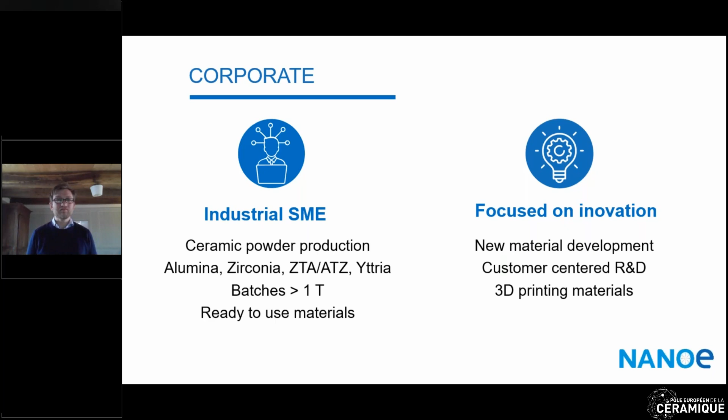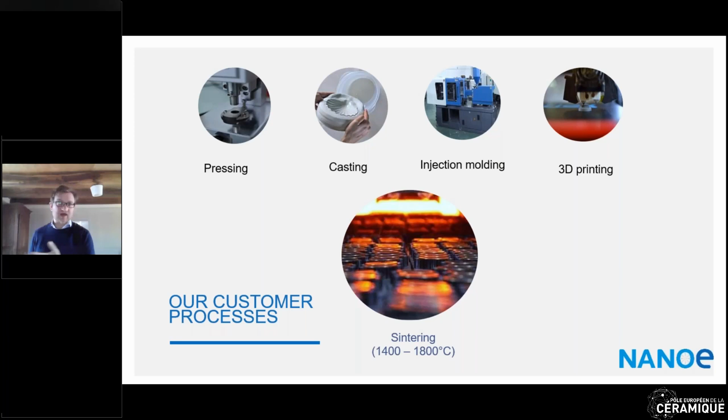So how do you make a ceramic in general? What do our customers do with our raw materials? Well, there are quite a few different processes for shaping ceramics, but it's always the same thing: you have a shaping process and then a sintering process. Shaping can be done usually by pressing, casting, injection molding, or by 3D printing, and we do provide raw materials for all of these processes.

So powders for pressing, slurries for casting, feedstocks for injection molding, and raw materials that can be used directly in 3D printers. The main applications then are semiconductor, biomedical, and wear parts and toolings. In these fields, what we do are usually high-tech, high-end raw materials, most of the case for traditional shaping process, in order to increase the wear resistance and the life cycle of our customers' products.

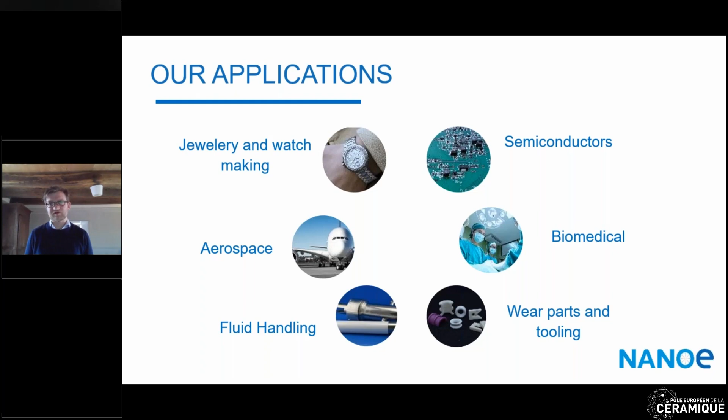So now let's talk a bit about Zetamix 3D printing. Zetamix is a brand we launched a bit more than 2 years ago. We started working on materials for 3D printing, and we decided to launch a line of materials for FDM printing.

So what do we do exactly in this case? Again, we're a raw material supplier. What we do is prepare raw materials that are compatible with existing machines on the market, here FFF machines, which are usually used for thermoplastics.

So how do we do that? We just make two steps of preparation. We do some compounding, which is a mixture of powder and thermoplastic binders, and then we extrude it to make a filament.

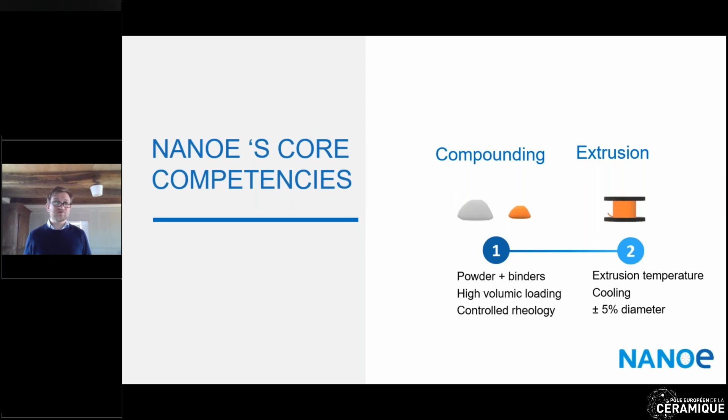So yes, our core competences are really in the compounding part, so a mix of several binders with a ceramic or a metal powder, and then the extrusion of these very highly loaded filaments. We usually have more than 50 volume% of powder in the mix, which means something like 80 to 90% in mass, and that makes it quite difficult to mix and to extrude.

Regarding the materials available, we started with ceramic, as this is really our core business - alumina, zirconia, black zirconia - and we recently launched also a stainless steel filament for applications mainly in tooling, but I'll go back to that later on.

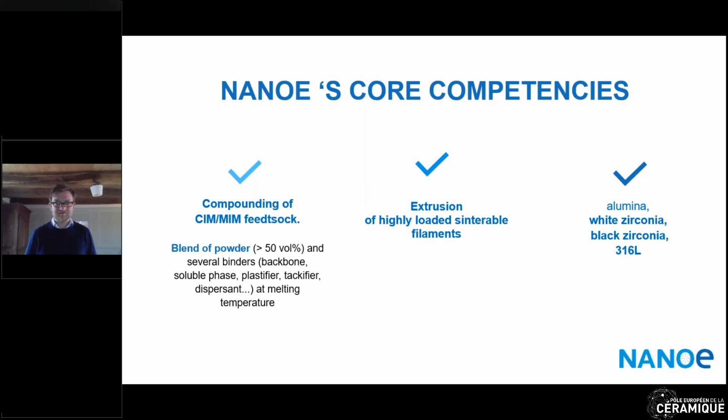So once you have that filament, how do you get to a dense part, to a final part? Again, it's a several-step process. As with any process to make ceramics, you usually have a shaping process, which will here be replaced by printing, and a sintering process.

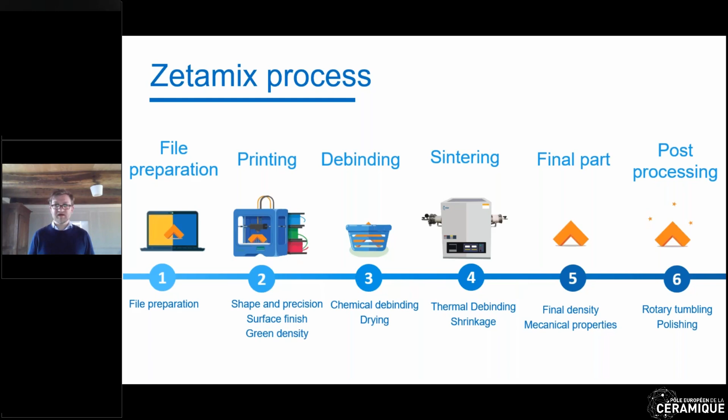If you go to the beginning, you actually start with the file preparation, so that's quite straightforward. Printing, debinding, sintering, and then you get the final part that you may want to post-process. I'll go in details about these different steps.

The first step is file preparation. As we are using open systems, one of the good things is we don't have a specific software. We use software which are already on the market, and most of them are open source. That means we just have to download it and we can use them to prepare our files.

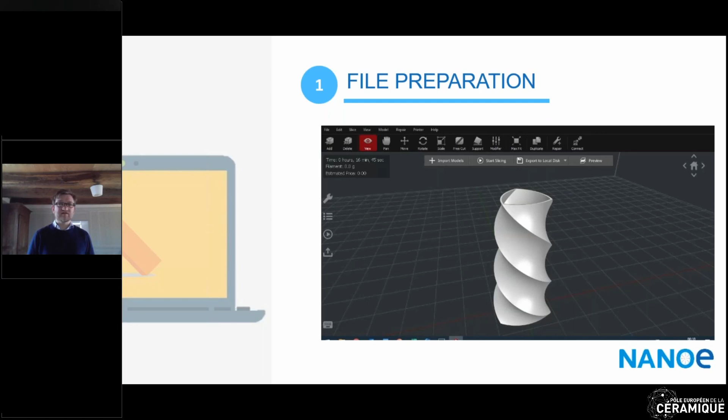This is a slicer called IdeaMaker, but you could use Cura or any other slicer on the market. With this slicer, we can see the virtual plate, the build plate of the printer, and we are going to load the part, the STL 3D file we want to print, and the slicer is going to translate it into a set of instructions for the machine. So this is what we see here.

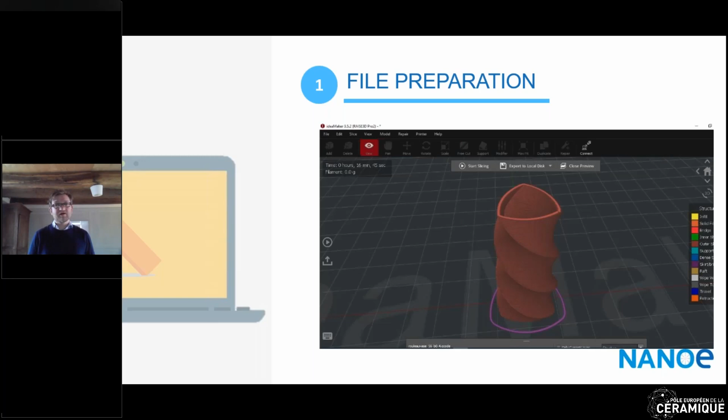We can see the layers, and that's really exactly the tool path that the machine will follow during printing. Once we have this file, we can upload it to the machine directly or through a USB stick or whatever, and then we go to printing.

Printing is really exactly the same thing as FDM and FFF printing. For those who are not familiar, FDM printing is made with a thermoplastic material. In our case, it's a mix of thermoplastic and powder in the form of filament, and this filament is pushed through a heated nozzle and melted. And we deposit the material in the melted phase, and it will cool down.

And make a solid part afterwards. We can also use a second nozzle to print with some support materials if we have some geometries which are not possible to print with just one material.

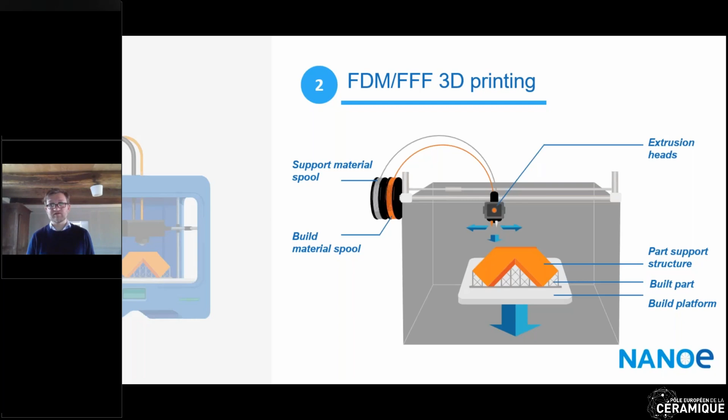Once we have printed, we get to the, I'd say, most complicated phase, which is debinding and sintering. Debinding, the objective is to remove all the plastic binders without damaging the part, and that's really critical - managing to remove all of the binder without having any cracks, any damage, any deformation in the part.

This is usually done by a two-step debinding process. The first step is solvent extraction - we will dip the part in the solvent, in our case it's acetone - and then the thermal debinding, where we put the part in the furnace, and in the furnace we will burn the rest of the binder.

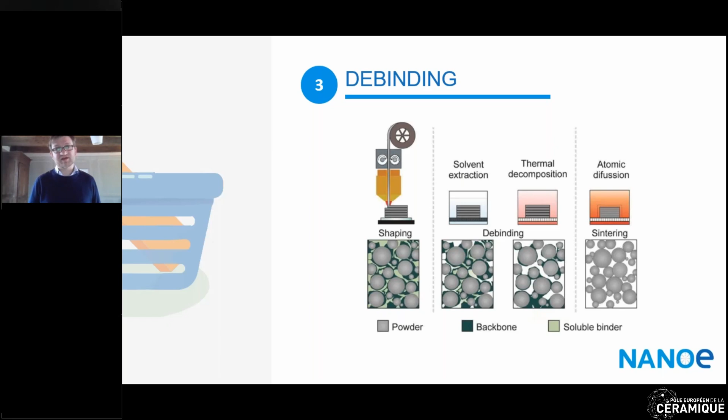And then once you have burned this binder, you will have what we call a brown part, or a debinded part, which is extremely brittle and which must be sintered to get to the final mechanical properties. What happens during sintering? Sintering means going to high temperature, a bit lower than the melting temperature, but still relatively high, to get to a dense ceramic or metal.

What happens during sintering is the porosity that you can see between the grains is going to be removed outside of the ceramic by solid diffusion phenomena, and the grains themselves will kind of melt together and grow to get to a dense microstructure. The typical densities we can reach with this process are up to 99% for ceramic. For metal, it's a bit lower, it's usually 90 to 95, but this is really quite good enough for most

applications. Obviously, going from a porous material to a dense material means there is some shrinkage. The porosity needs to go somewhere. And it goes outside of the part, and the part will densify and shrink. Linear shrinkage is usually between 15 and 20%, which is very significant and which is something that needs to be anticipated in the file preparation, and it will also have an impact on the precision and everything.

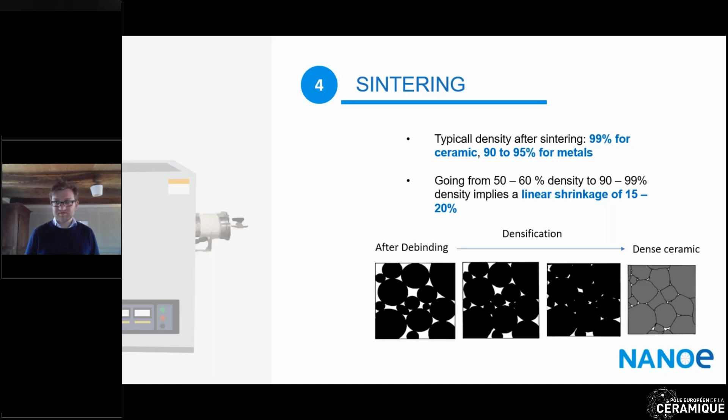What are the key benefits of this technology? The first thing is it's a very easy to use system. If you compare it with any technology for ceramic or metal 3D printing, I'm not saying it's completely obvious, but it's much easier to launch and to get started with 3D printing. Training time for this system is usually 1 day. When we sell some machines, we take 1 day for training, and customers are ready to print some parts.

It can be used by any trained technician. You don't need highly qualified people to use that. And there are very few security issues because we're not manipulating powder. We are manipulating filaments. That's really something which is quite beneficial. The investments are very low cost, and that's really one of the main things.

This comes from the fact that we are using an open system. That means you can use our filaments with any kind of printers. You don't have to buy the printer from us. We can sell some printers, but if we do that, we just buy them, adapt them a bit to the filament, and resell them. But we are not a machine manufacturer. We buy machines from the market, which allows us to have a starting offer with a printer, a debinding kit, and furnace, all of this for 10,000 euros.

And this is unheard of. You have no other technology that allows you to print metal and ceramic for that kind of investment cost. This is really unique. It's also a versatile technology. It is compatible with a wide range of materials.

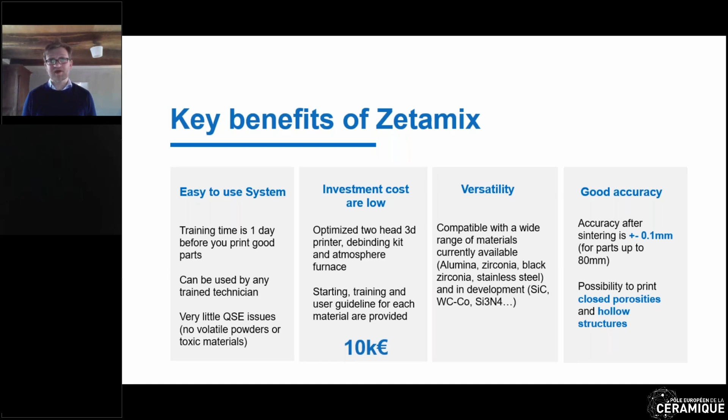Obviously, as any 3D printing technology, it's also interesting in terms of making complex parts, hollowed out structures, very low volume production, and so on. The key benefits I was stressing are mainly compared to other technologies. If we do want to compare with other technologies, here is a small benchmark of the mainstream technologies for printing of ceramics. I know that other technologies exist, but these are, I would say, the main ones: binder jetting, inkjet, SLA, and

FDM. Well, the first thing is obviously FDM will rank as the lowest cost in terms of price. This is the lowest investment cost you can find. In terms of accuracy, it's not the best, but it is relatively good. It allows you to get to dense parts, which is not the case of all these technologies, and the speed of printing is quite good. Again, everything is relative here. I'm not saying it's super fast compared to some other technologies for polymers, but for ceramic additive manufacturing, the speed

is relatively good. Apart from this technology, I would say that the most mature technology is probably SLA 3D printing, which is made with resins, and where you have a few players already making machines for this technology.

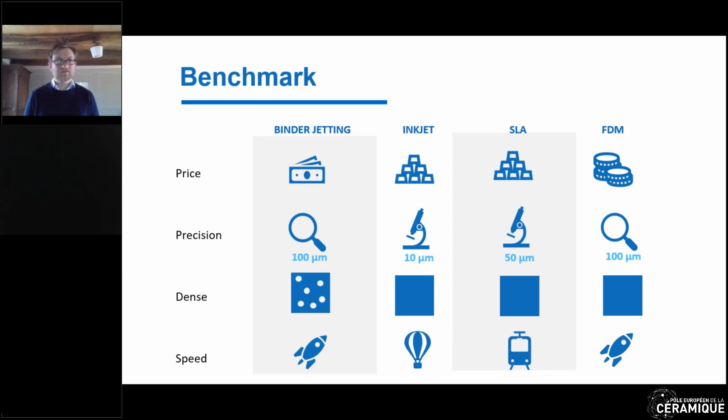What are the applications? Here I'm going to present only applications about ceramic afterwards, but I just wanted to mention metal also. The number one application we have for this technology is actually tooling. That means customers are using the system to print parts that are used internally. They're not selling printed parts. There are a few exceptions, but most of them are not selling printed parts. They are making tooling for internal use.

You do have a few industrials who are printing complex ceramic parts, usually for high temperature applications, parts that could probably not be made by other technologies. And then you have a bit of prototyping, which was one of the first applications of 3D printing. We do have a few customers using it as a prototyping unit. For metals, it's mainly about tooling for the moment.

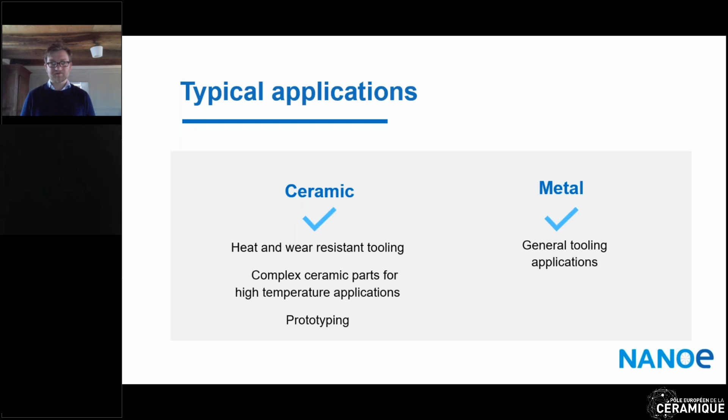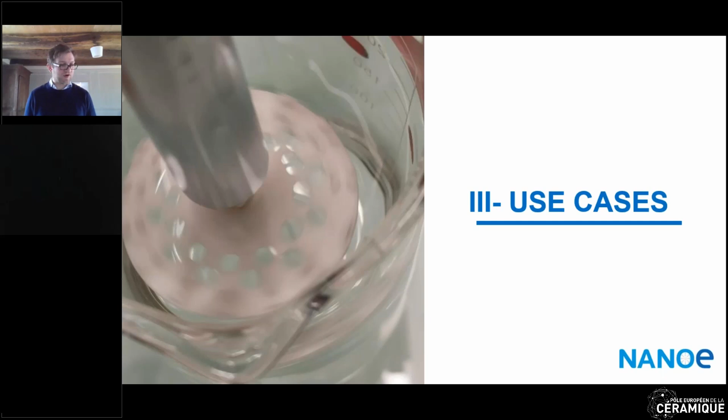So, about some examples of application. I'm going to show you 4 examples, 4 use cases. 2 of them are about tooling. 1 of them is for a complex part, which would not be made in any other way. And the last one is for prototyping. So the first use case, it's an application we developed with the ESRF, which is the European synchrotron based in Grenoble.

And also, it's a lot of small on-demand parts. Each experiment needs a different sample holder, a different heating element, a different kind of sample environment in general. That means it's a lot of small, complex parts in low volumes, usually with quite urgent requirements, which is really a perfect use case for 3D printing.

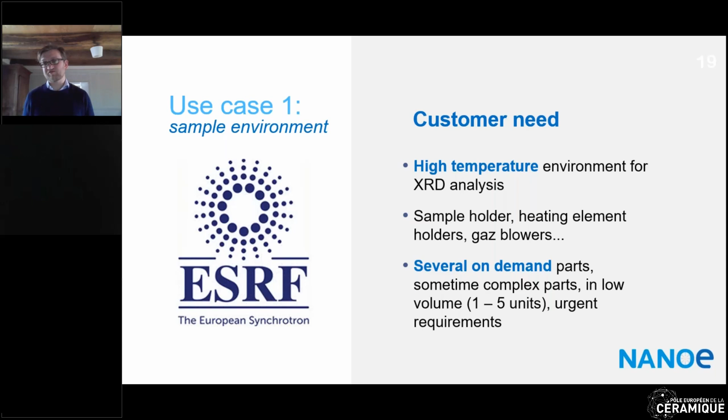So what does the ESRF do with our technology? They make, for the moment, mainly 3 parts, even though some others are in progress at the moment. Some simple parts, such as heating cartridges, the 2 pictures on the top, where you can see a ceramic part which is 3D printed and heating elements. Some sample holders, which are also relatively simple, on the lower side and on the left side, and then they have a future project which is a bit more complex about making some water-cooled micro furnaces.

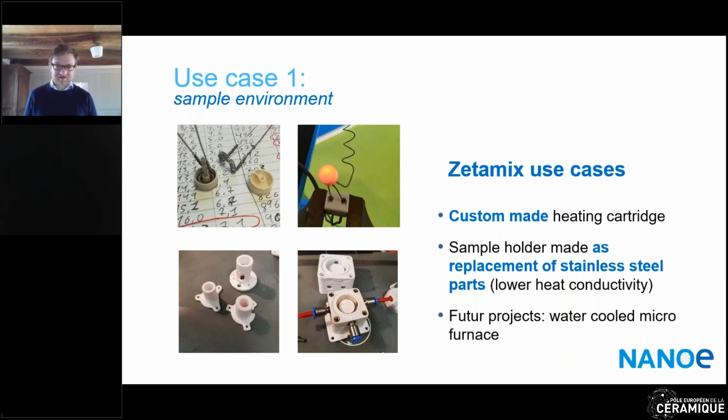So a furnace where you can go up to 1200 degrees C inside, but the wall would still be at room temperature because it is cooled by a water circuit on the outside. If you focus on the 2 first ones, which are already being used by ESRF, they're really being used for actual measurements. Sample holders, it's quite simple.

They started because they had an experiment where the sample holder was in stainless steel, and they had a problem of heat conductivity. The stainless steel was too conductive, which meant that the samples were not at the targeted temperature. By replacing with ceramic, they managed to solve that problem, but because the measurement was already going on, they needed the replacement as fast as possible, and they managed to reduce the part production between design, printing, debinding, and sintering to 1.5 days before they could replace the stainless steel part with a ceramic part.

Regarding heating cartridges, here it's a different thing. This is usually planned a bit before, so there's not so much of an emergency, but it's a lot of custom sizes and shapes. Every heater is different for every experiment. And so having it 3D printed is very convenient. The ESRF can really adapt to every experiment. And there's also a cost-saving issue. Printing the part costs almost nothing, to be clear. And if you had to buy these heating cartridges, it would be much more expensive, especially if you want to have them on demand.

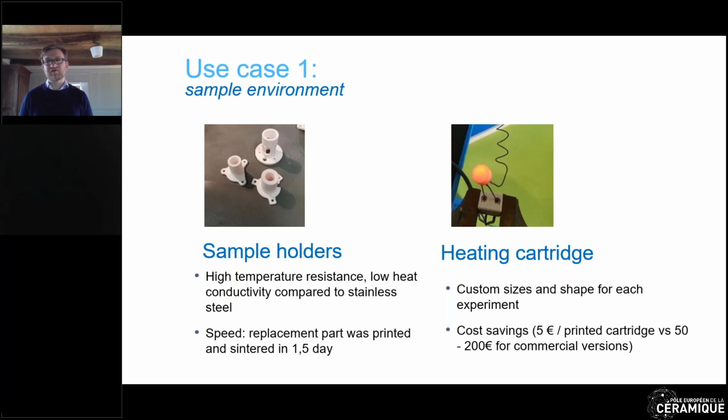So the second use case is regarding the ink preparation industry and also the ceramic industry. Actually, it's about custom impellers. We do have a few customers who asked us if we could print custom-made impellers with specific shape and especially with specific size to adapt to the size of the container. There's also an issue which is to avoid tool wear and oxidation and pollution in the product. Usually the impellers are made in stainless steel, but that can lead to pollution in the material. And also, obviously, the part replacement needs to be fast.

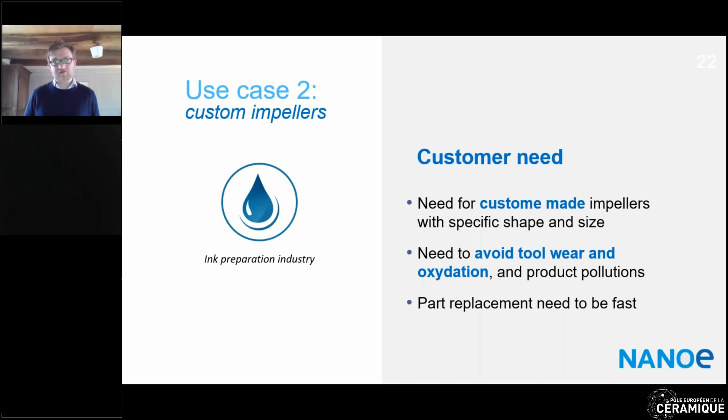So the first trials were made internally. We actually used it for our own production of ceramic powders. And we started even in the lab. This is what you see here.

So we decided to replace a stainless steel impeller blade by a ceramic one, which allowed us to modify a bit the shape and the size of the impeller, and to make it in zirconia. Zirconia is a very high wear and corrosion-resistant material, and that allows us to stir very corrosive, very aggressive suspensions without any risk of pollution.

Also, the savings on cost and time, if you compare it to a part that would have been prepared on demand in ceramic, are very significant. Even having a quote for one part in ceramic is sometimes very hard. So having it delivered is very long and quite expensive.

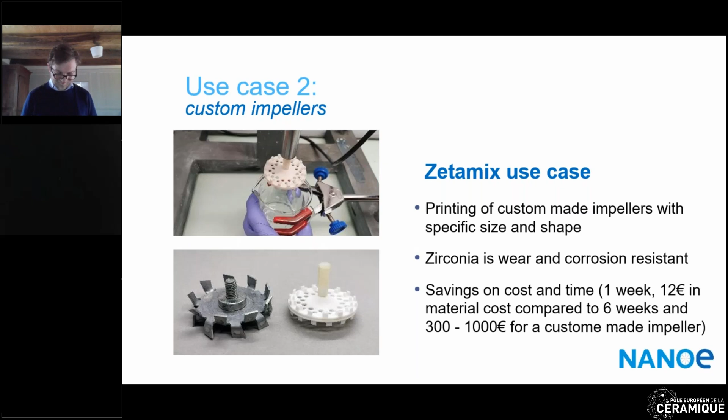The third use case is one we have with Avignon Ceramic. Avignon Ceramic is a very well-known manufacturer of casting cores in ceramic, mainly for the aerospace industry. But here they had a requirement from a few of their customers for something a bit different. It's not a casting core, it's actually a flow sensor, a high temperature flow sensor. And the part itself is quite simply impossible to manufacture by traditional ceramic process. Why? Because you have a lot of internal channels.

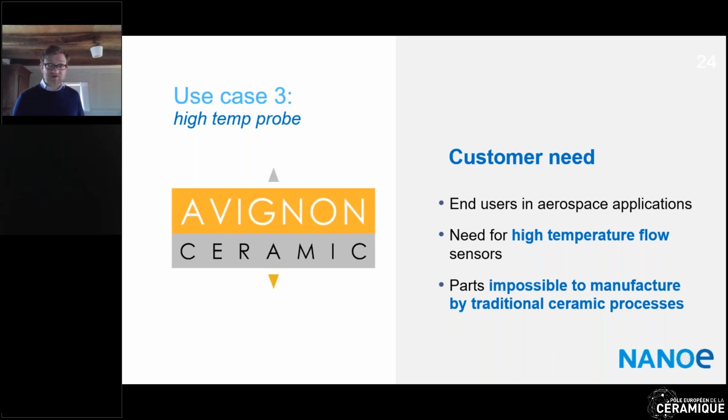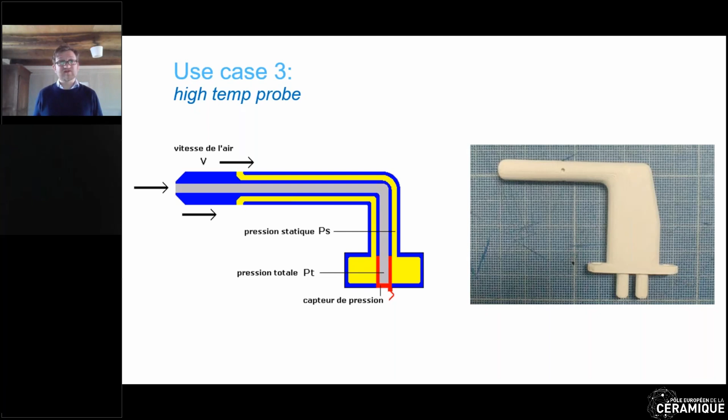And why do we need it in ceramic? Well, for high temperature. A standard one, it's called a pitot probe, is usually done in metal. It's done by assembling, welding, that kind of process. But this is not possible if you need to go to high temperature.

Here are some actual pictures of parts printed by Avignon. I think some people from Avignon are here, so I can thank them directly for the courtesy of giving us those pictures. You can see some kind of flow sensor probe with a few specificities.

The first thing is it was made with obviously some internal channels. It was made in a hollowed out structure, which is better for thermal shock. It was made in alumina, which can withstand very high temperature. And we could even add some more complex parts with some more holes, potentially some cooling, heating circuits. Anything is possible. And on the bottom, you can see that it was inspected by dye checking, because obviously this part needs to be perfectly dense with no defects and no cracks.

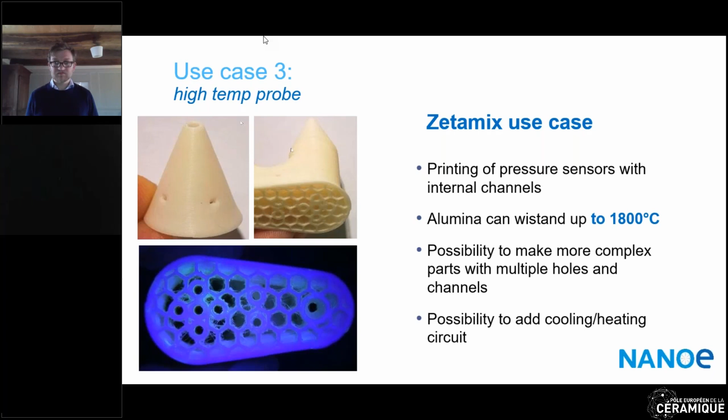And the last use case here is for watch prototyping. It could be used actually for any kind of prototyping. We do have quite a few of our historical customers who are using traditional processes for ceramic. Usually it's injection molding or pressing, to make it simple, which are really amazing processes for high quantities of parts. We are really not believers in the replacement of these processes by 3D printing, because for high volume they are extremely effective.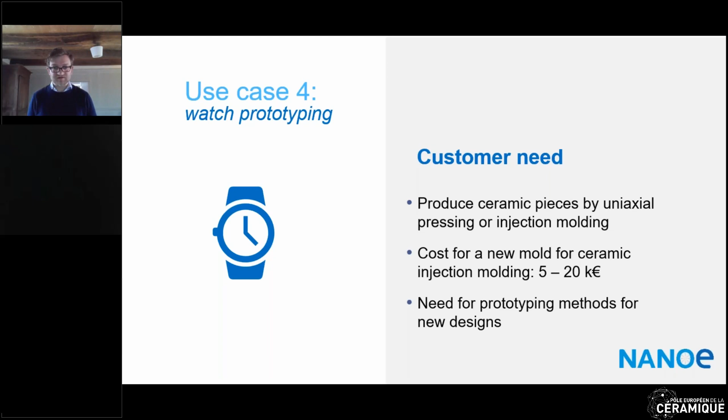But when you need to do small quantities, it's much more complex, because you need a mold, you need a tool. And these molds for injection molding are quite expensive. They start usually at a few thousand euros. They can go up to 10, 20, or even more, depending on the complexity of the part. Which leaves a gap. That means when you need to make small quantities or prototypes, you don't know how to do them. So you can use other processes, of course, but 3D printing would be very convenient. So this is what our customers do.

It would not be acceptable for production, but for prototyping, it's perfectly acceptable. And it allows to iterate very quickly. It allows to test more designs. If the designers are not sure of what they want, they can test 5, 10, 20 designs, and they can iterate very quickly before they decide which part should go in production.

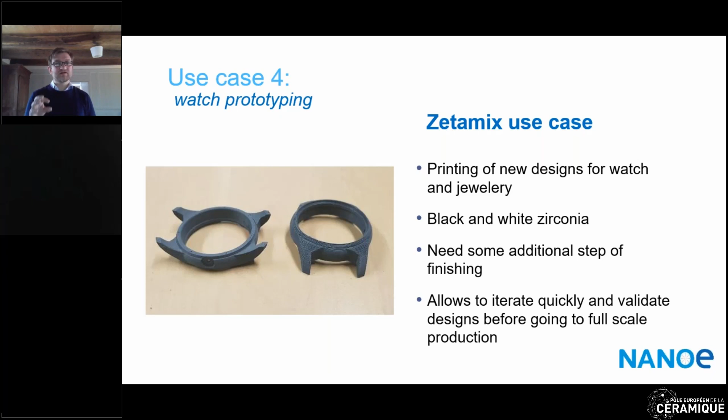That's it for my examples. Thank you very much for your attention. I'll take some questions if you have some.